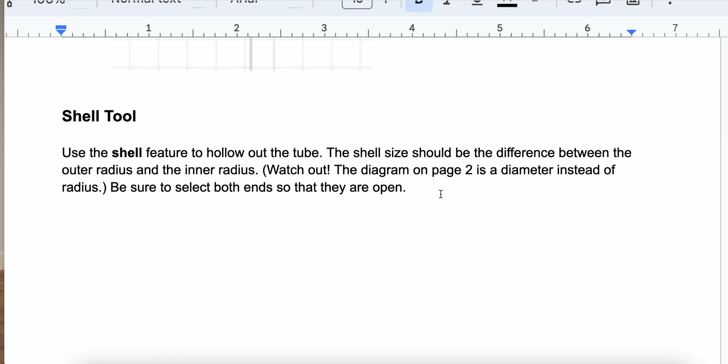What's next? Well, we need to shell this thing out to hollow out the tube. The shell size should be the difference between the outer radius and the inner radius, but we have to watch out because the diagram from page 2 is showing us diameters instead of radii. Be sure to select both ends so that they are open, because we want this thing to be a completely hollowed out tube.

So if we look back at page 2 where these diameters are being shown, we want the shell size to just be that difference, but we need to make sure that it's happening just on each side, one side at a time. So to find the radii, we could take the diameters, divide by 2, and then subtract. Or we could subtract the two diameters, find the difference, and then divide by 2. It works both ways.

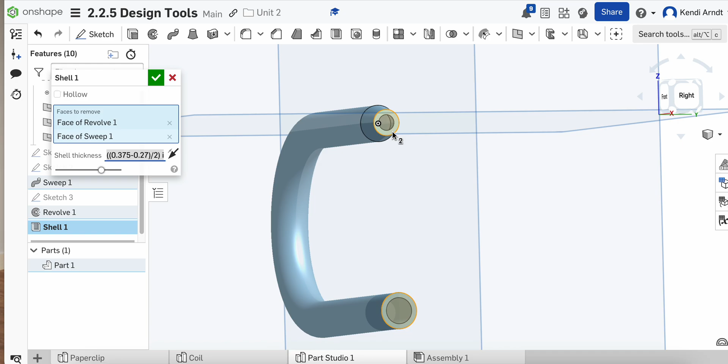Here in Onshape, to apply this shelling, we need to select the shell tool from our toolbar, and I'm going to specifically remove this face and that face. For the shell thickness, I don't have to do the calculations. I can simply tell it to take 0.375 minus 0.27 and then divide it by 2 to deal with this radius issue. So I'll hit enter to see a test piece. That really looks pretty good, so green check it.

So this thing truly is hollow all the way through. I know it might be hard to see, so if you're wanting to look at it from a section view standpoint, go ahead and show these analysis tools and select, sorry, it's up in our camera and render options. Here's the section view all the way at the bottom of it.

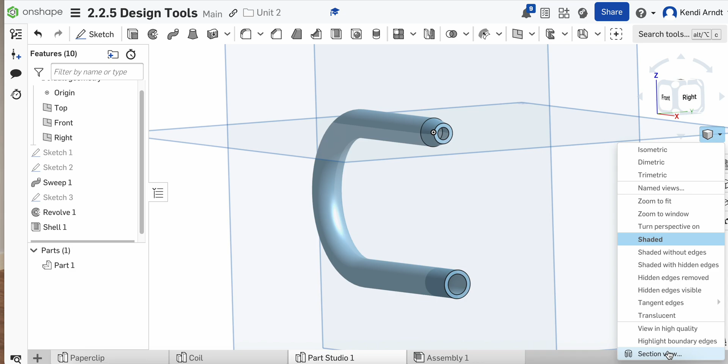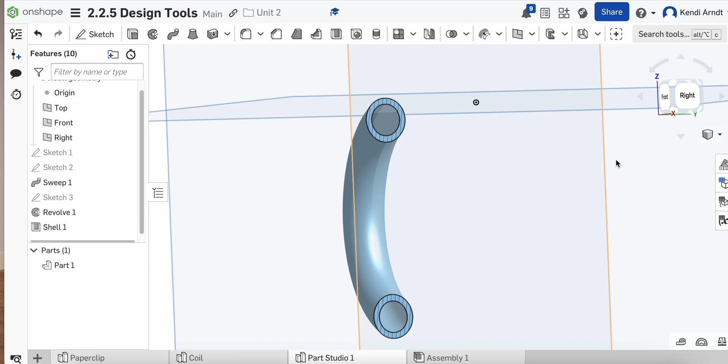If I select a plane, such as the right plane, and drag my arrow back so that I can see farther into this thing, I can see here are my section lines. That's the solid material. This is open because it's a hollowed out tube. If you want to hit the check mark to really see it, that works great. If we want to make it go away, check out those options again and turn the section view off. So our tube is totally hollowed out. That looks awesome.

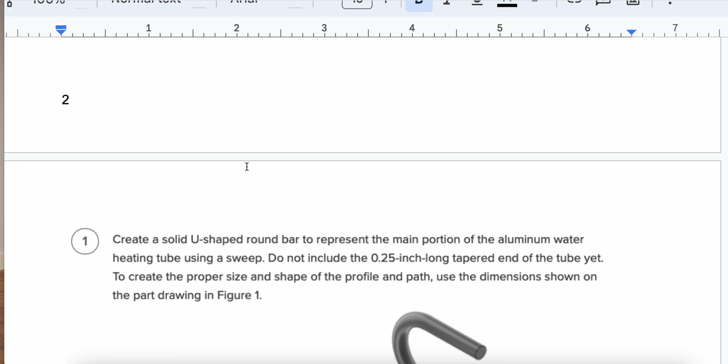What else is there? Well, we do still need to add those threads. So I'll just double check, we did the shell, now threads. A thread feature allows you to model threads on a cylindrical curved surface. An external thread is a thread created on the outside of a cylinder, such as on this bolt. An internal thread is a thread created on the inside of the hole, like the threads inside a nut.

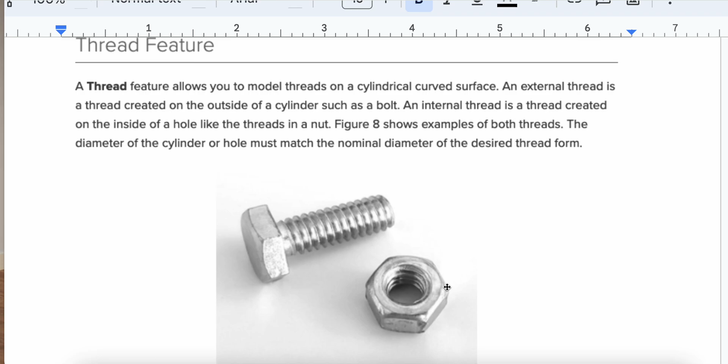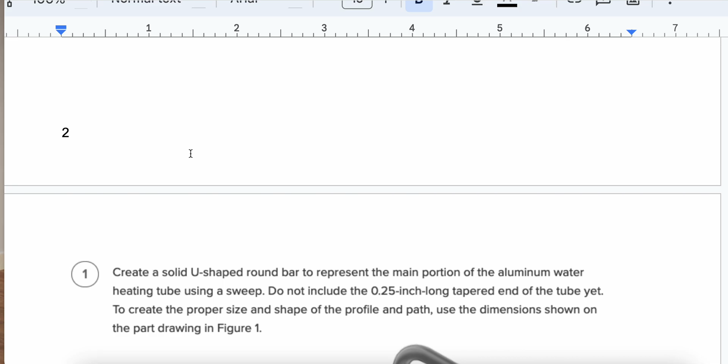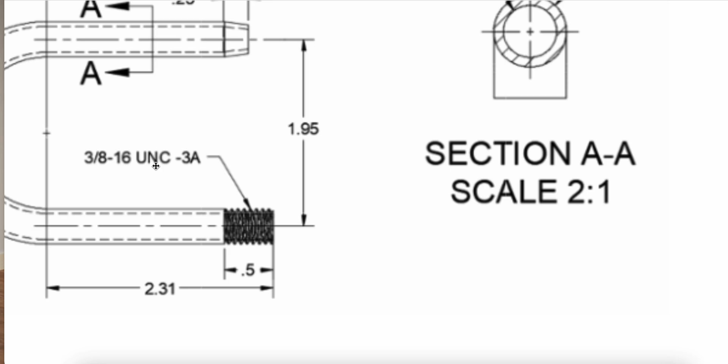All right, the diameter of the cylinder or hole must match the nominal diameter of the desired thread form. So we had created the tube to be 0.375 inches on its outside diameter, because the diagram shows us we're selecting threads that are 3/8 of an inch, so that's the outside diameter, and then the dash 16 is 16 threads per inch. That's how many threads we would see if we had a full inch. This is only a 1/2 inch in distance, so there should be 8 threads here, so 8 turns essentially. And UNC is a code in ANSI standard, and 3A happens to be a specific size for the pitch of it.

Okay, so what does this say below? Use an external thread for ANSI standard threads, 3/8 inch. It matches the diameter of the pipe, and 16 threads per inch. You will not be able to see the threads on the model, but you can see that they're there in a drawing file. Yes, it's really kind of a bummer. Onshape is only capable of doing cosmetic threads. So this is at least a new feature. They have been adding features over the last couple years. It's not perfect yet, but it's getting better.

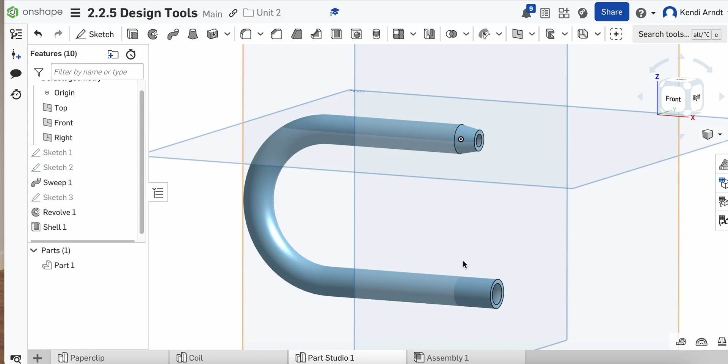So right on this part of the pipe, that's where we need to put these threads. I can see mine, it's right here on my toolbar. Go ahead and click external thread. Select the cylinder edge, it does have to be an edge, not just the outside of the pipe. So select that edge where it's going to go from.

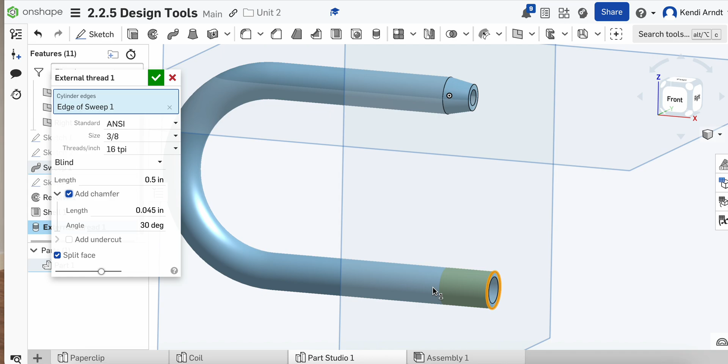Make sure it says ANSI as the standard, and then you might have to look through because we're trying to find 3/8 of an inch. It might find it by default. Make sure 16 TPI, threads per inch, is chosen. Make sure you select blind and make sure the length is 0.5 inches. We don't need to add a chamfer that puts a little cut edge on the end. We also don't need an undercut, which stops and separates the threads from the rest of the pipe. So we don't need any of that, but go ahead and click the green check.

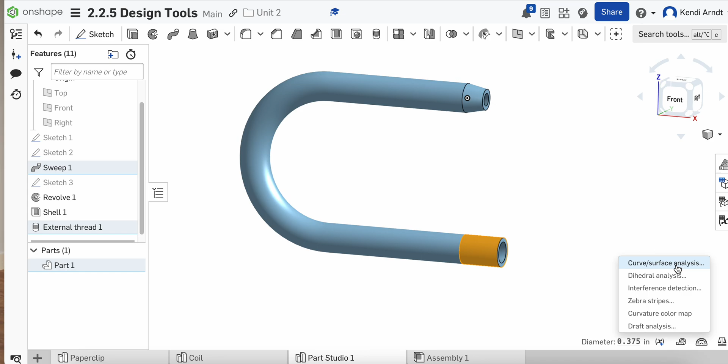Yeah, looks really super lame. It did nothing, I see it here, it's black so there's no error, but where is it? Well, I did find a way that you can look at it-ish. If you select that, it is a separate piece. And then I went to the analysis tools and chose curve/surface analysis. And so it is kind of showing or indicating that there is something there. It's just really unfortunate that there's no other way to see it.

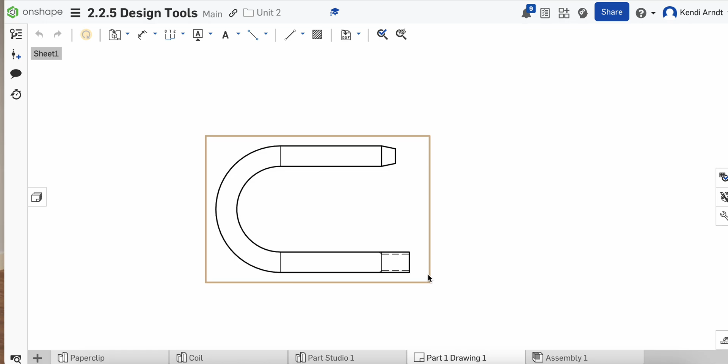But if you right click to create a drawing of part 1, make sure it's in inches, make sure it's 4 views. Let it think a little bit. When it puts it in the front view of the multi-view, it shows these dashed lines here, which are not hidden lines, but this is identifying the threads.

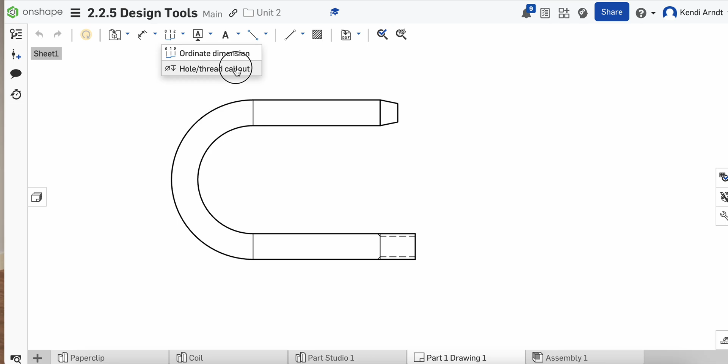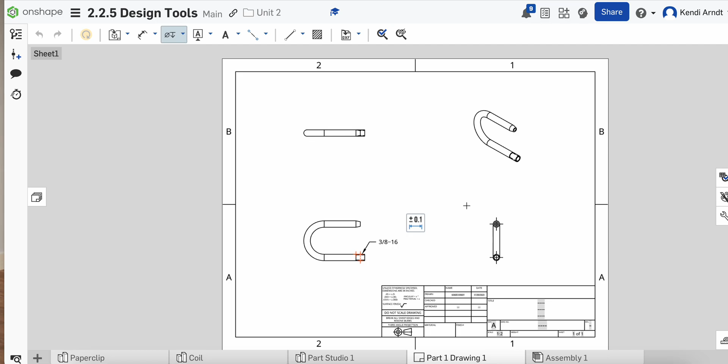So if we were to select the hole or thread callout, you should be able to find it on your toolbar, hole and thread callout. There it is. We should be able to select that edge, and sure enough, it gives us the 3/8-16. So it is there, it is present. It's just not going to give us the visual of it like I would like to see. So that's kind of a bummer, but like I said, it's better than it used to be.

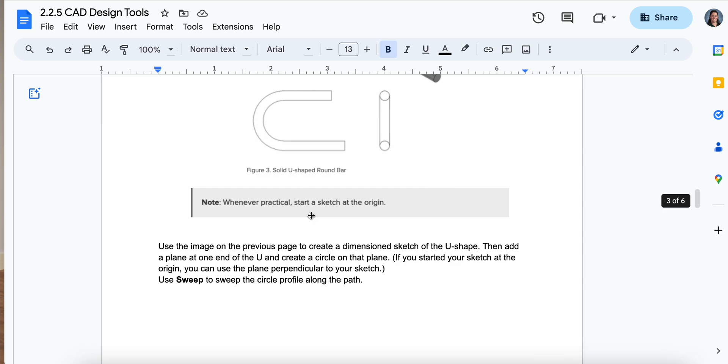Okay, so I think that's it for finding and creating this entire sweep, tapering, shelling, and the threads on this particular heating tube. So great work, hang in there. There is one more part to make. I'm hoping that you're able to figure that one out after all of these tools have been used.